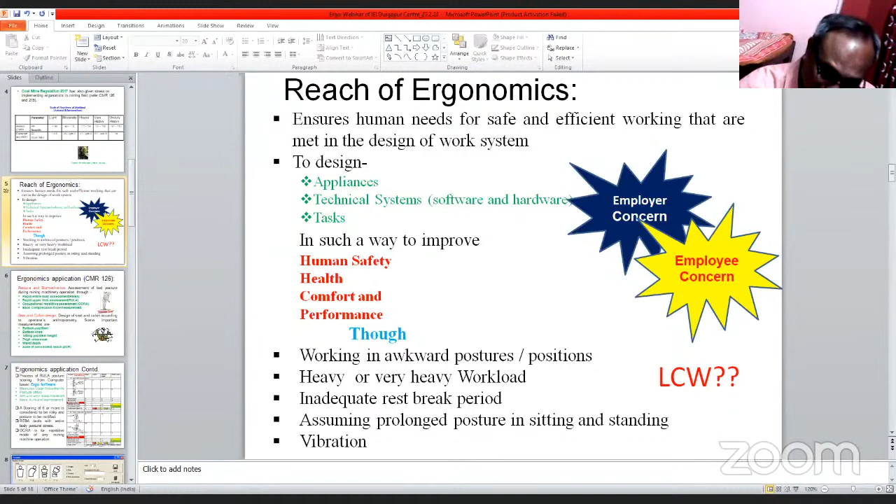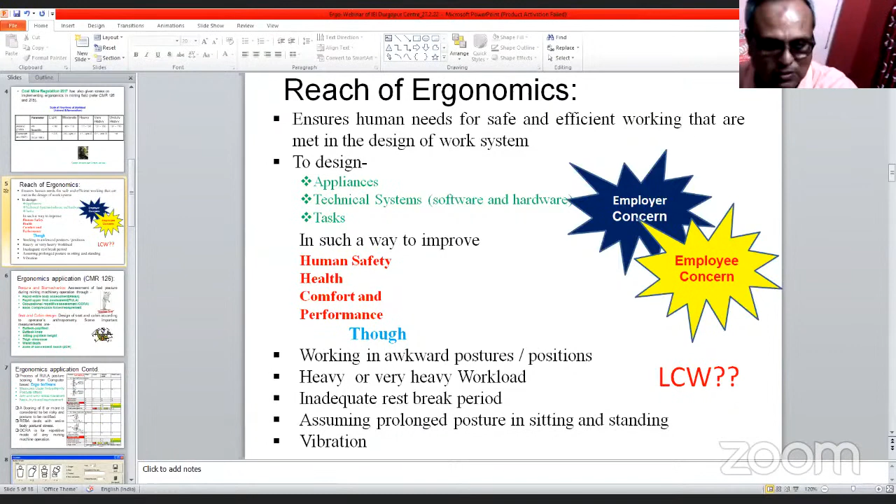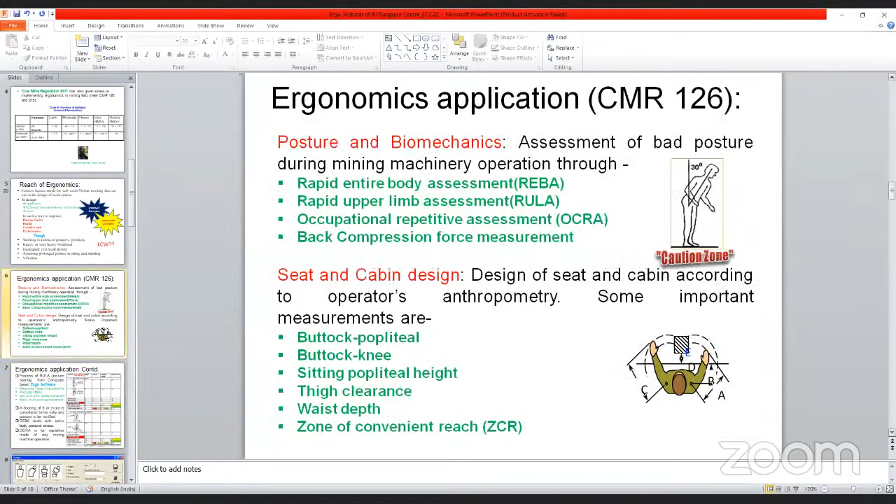Slide is not moving again, sir. Yes sir, yes sir. Now fine, sir. See, while I'm coming up from the PPT showing it is coming, it is short one. When I go full screen, will it work in this? Can you see it? It is visible sir. No, full screen not required for recording. Okay thank you.

So let's see now the ergonomics application on the RULA posture, rapid upper limb posture. You see, it is based on the computer scoring, computer-based scoring. This sort of thing you didn't come across.

If it comes to 6 or more, the posture is considered to be risky, and this posture is immediately to be rectified. Likewise, the REBA, rapid entire body assessment, deals with the entire body postural stress. OCRA deals with the repetitive mode, for example drilling in mines, we are putting repetitive holes - one hole, second hole, third hole, fourth hole, fifth hole.

So this OCRA - likewise this other one is not OCRA, this is the RULA, so OCRA will come into place. Based on this, your computer-based software calculates this OCRA score, and if it is coming beyond the risky zone, then we have to give some sort of recommendation.

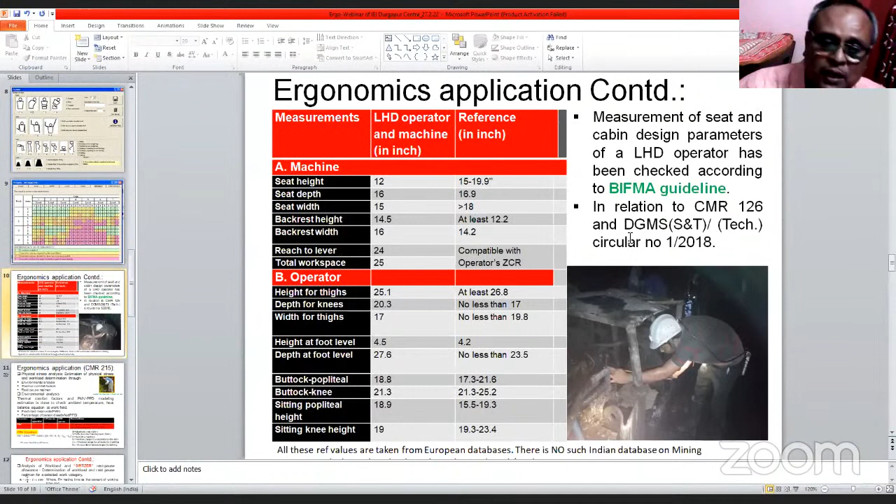Likewise we can examine every machine with the reference value against the operator measurements. We can do this for every LHD operator - load haul dumper. This is the load haul dumper. Likewise there are different other machines - continuous miner, drill machine, SDL machine, side discharge loader. All machines can be checked through these BIFMA guidelines. These are very important guidelines which ergonomists follow, and all these things are now coming in the DGMS circular 1/2018.

Now comes the 215 CMR, coal mine regulation. Here we have to estimate physical stress and do workload determination through different analyses - environmental analysis, thermal comfort factor analysis, and rest-pause regimen, which is known as work-rest bouts or work bouts simply. Next comes the environmental analysis - the thermal comfort factors like PMV and...

PPD mode - these are the predicted mean vote and percentage of persons dissatisfied. These are the models ergonomists follow to find out the environmental analysis, or environmental impact on the fatigue of the workers. Based on that you can see the PMV parameters.

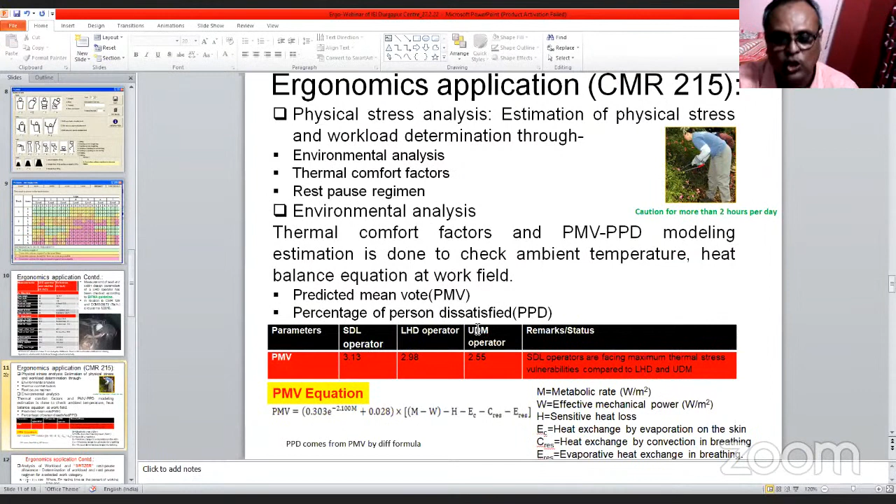We calculated this much for the SDL operator, this much for the LHD operator, and this much for the UDM operator, the drill machine operator. We found that SDL operators are facing maximum thermal stress in comparison to LHD and universal drill machine operators. So there is this PMV equation also.

Now you see there are some rest bouts. R means the resting time - you can immediately calculate one resting time. How? This is based on the Spitzer model, which uses workload as the basis for the rest-pause regimen for a selective category of workers. E means the energy expenditure, calculated in kilocalories per minute.

So you have to find out the kilocalorie value based on your beats per minute. I have shown you earlier the Astrand scale. Based on the Astrand scale, we will be finding out - we can convert HR, meaning heart rate, towards the energy expenditure.

Energy expenditure by 4 minus 1 into 100 gives the percentage of rest to be given per hour. For example, if energy is 5, then 5 by 4 minus 1 is 1.25 minus 1, which is 0.25, so 25%. This means in 1 hour, 15 minutes should be my rest per hour.

Likewise, the measurement of heat stress WBGT (wet bulb globe temperature) and threshold limit value differs for different depths of mines. As you go to different depths, the WBGT value changes, because it is based on 0.7 natural wet bulb temperature and 0.3 radiant temperature. This is known as the radiant temperature.

Based on this, NIOSH is the National Institute of Occupational Safety and Health, and this is the American Conference of Governmental Industrial Hygienists. Based on that, you have to select whether you will follow the NIOSH scale or the ACGIH scale. Hardly in India do we have this sort of scale.

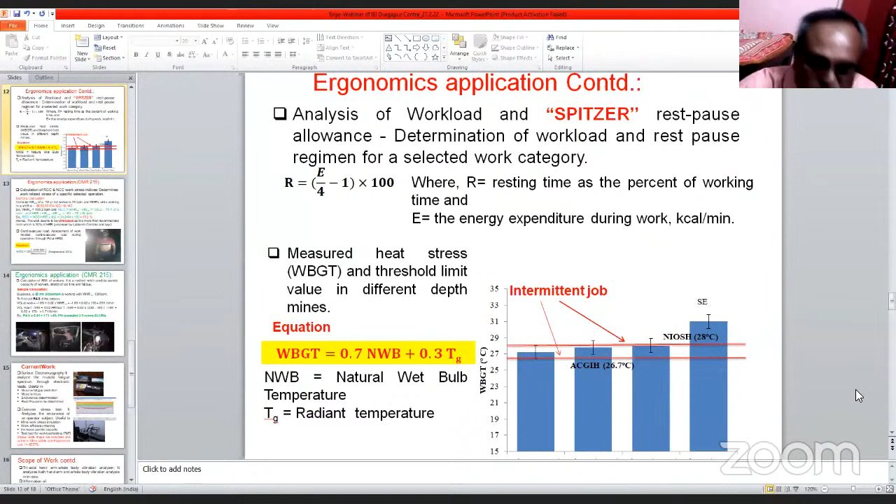You see this person, we took this study underground. In this, the MHRM is attached, this is the sensor on his chest. Its name is MHRM, mobile heart rate monitor. This is attached, the HRM.

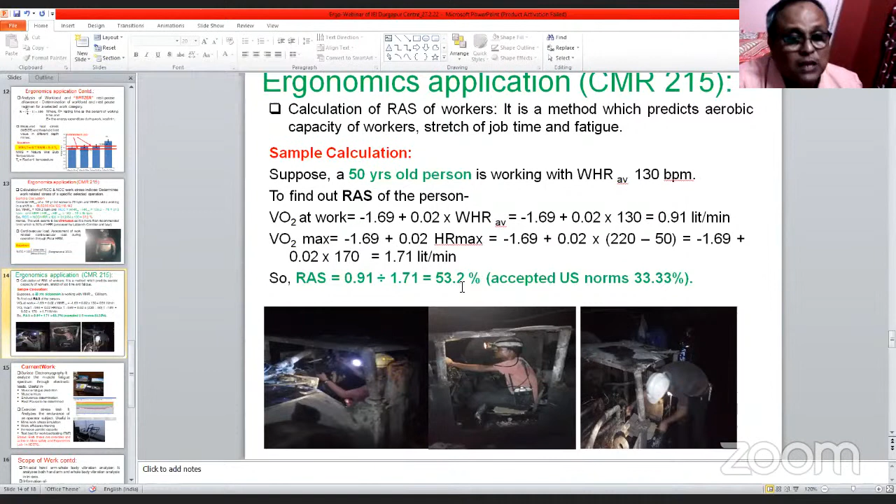HR max is 220 minus age. Age is 50, so it comes to 1.71. So relative aerobic strain will be this divided by this, which comes to 53%. It is much higher. The US accepted norm is only 33%, one third of 100. But here it is 53.

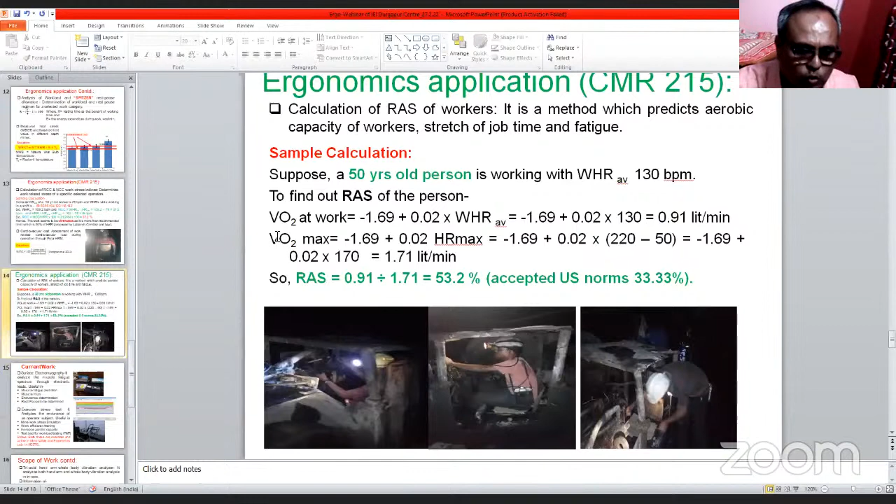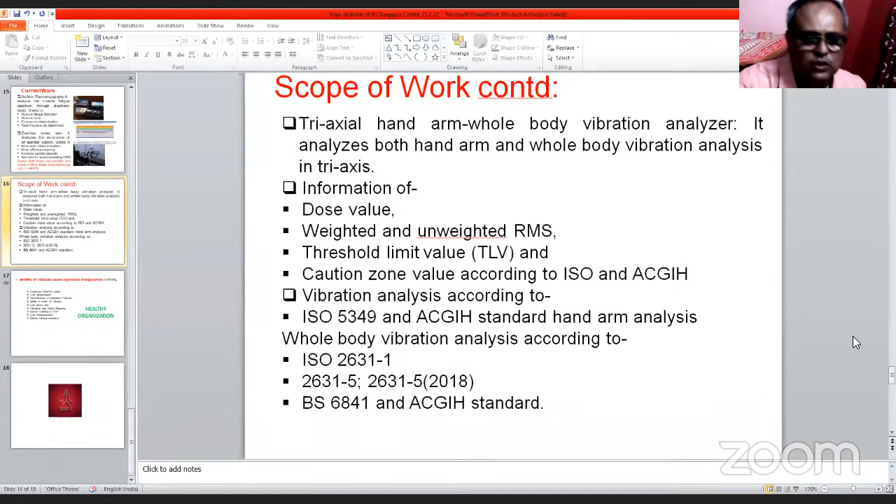What are the other scope of work? The triaxial hand-arm related vibration analyzer, we can do it. So I can give you this sort of information, this vibration is required, and based on this the information is required: what is the dose value, what are the weighted and unweighted root mean square values, what are the other threshold limits, based on different ISO and American Conference of Governmental Industrial Hygienists standards. Based on this, we have to find out whether the dose value is correct and whether the other threshold limit value is correct. We will be able to compare.

Now what are the benefits we have? The benefits due to this computer-based application in ergonomics and mining will give you improved comfort level. You can have low absenteeism. You can improve posture so that awkward posture can be identified. Not only that, you can give recommendations on how posture can be made beneficial towards the worker so that their musculoskeletal disorders will be delayed, or there will be no musculoskeletal disorders.

And now the very important term, the delay in onset of fatigue. For fatigue assessment technique, there is the Brouha's technique; due to paucity of time I am unable to show how fatigue assessment is done by this technique. So there is a technique by which fatigueness can be assessed. This will obviously give us a lower injury rate, and by this we can have better occupational safety and health, and it will give very low compensation. Why low compensation? Because almost all mining companies give some compensation to workers at the end of the year due to injury. That compensation would be very low or insignificant if we can bring in all this ergonomic application we are discussing.

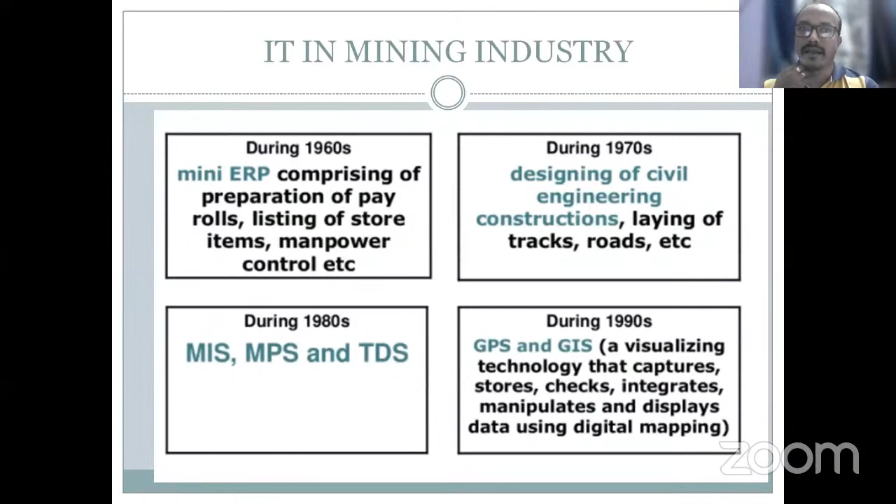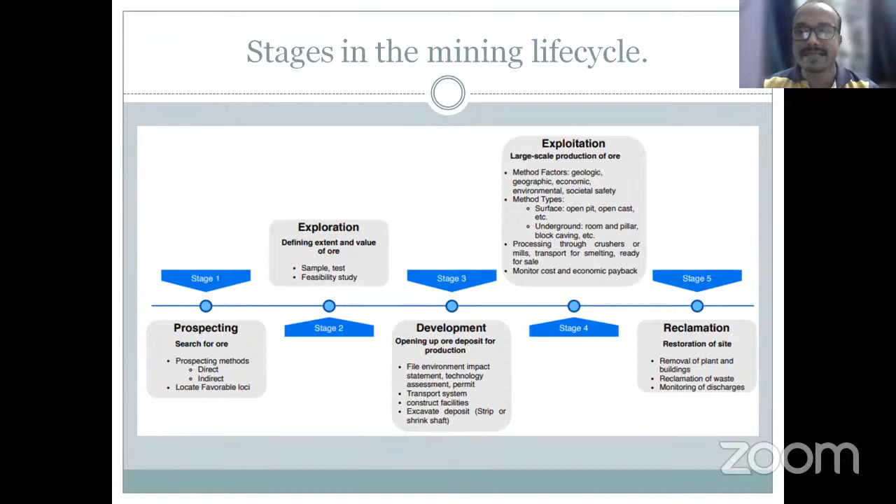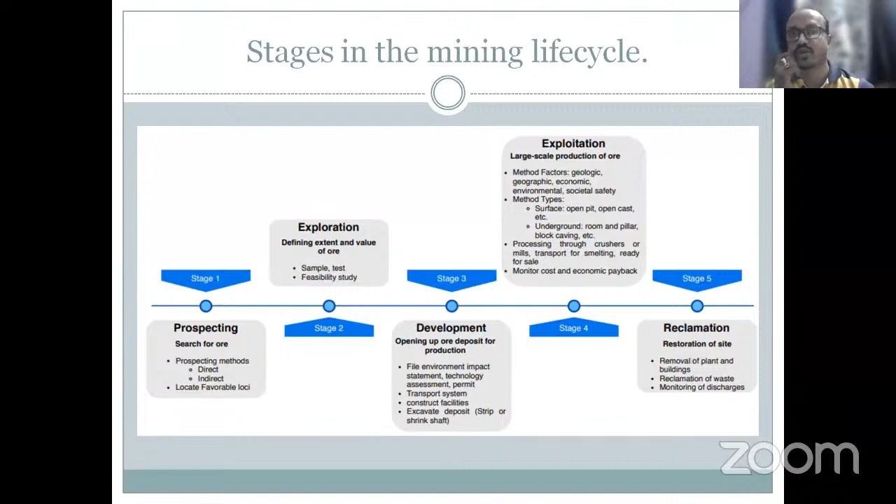The last stage is reclamation, which is nothing but the removal of plants and buildings, reclamation of waste, and monitoring of discharges. Those are the 5 stages in the mining life cycle.

Now, IIoT standardization: the relevant industry reference architecture proposed by standard bodies. In my lecture, we discuss 4 standardizations of IIoT. Number 1 is Industrial Internet Reference Architecture, number 2 is RAMI 4.0, number 3 is oneM2M, and number 4 is the Arrowhead framework. These 4 IIoT standardizations will be discussed throughout our lectures.

In the business layer, they provide functions to allow end-to-end industrial operations such as work planning, scheduling, enterprise resource planning (ERP), and life cycle management. In the application layer, it allows the execution of tasks or goals by implementing the actual application logic, such as the application programming interface and user interface. Those are examples of the application layer.

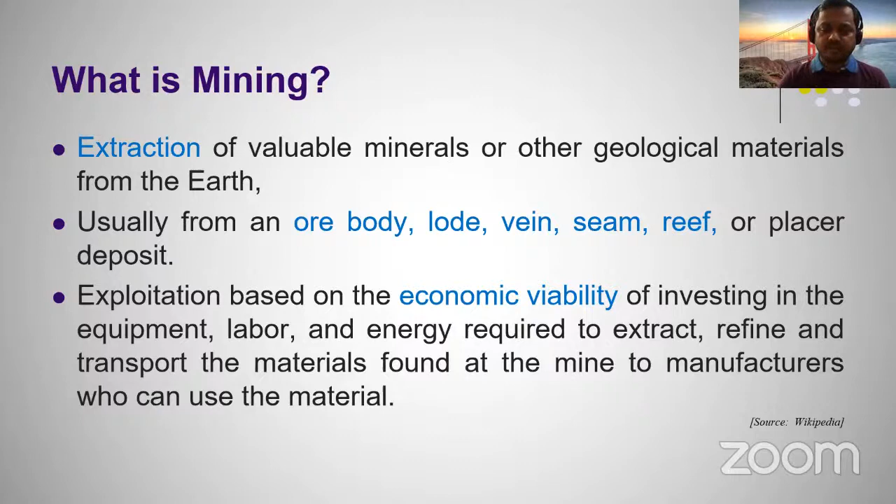Now we have to know what are the places where we can apply computer. There are so many areas in mining where we can apply computer, especially surveying machines, conveyor belts, and GPS systems. In surveying machines, the surveyor machines are connected to laptops to get 3D views of the distributed geology around a place. Computers are also used in controlling the conveyor belt nowadays, and we can even use GPS systems to track each and everything that we want to track.

And one more thing, the operational data is huge data. To control those data, to preserve those data, and to get some analytics, to get some pattern from those data, we need the help of storage in computer.

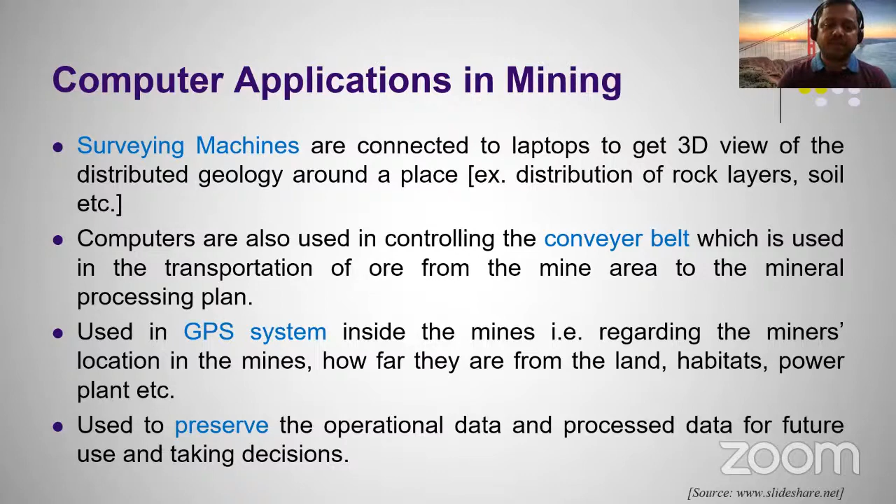Now, what I would like to suggest is computer application in mining, or rather we should say digitalization in mining, because digitalization in mining is basically the greater term compared to computer application in mining. Now, what is digitalization in mining? It refers to the use of computerized or digital devices or systems and digitalized data that are used to reduce cost, improve business productivity, and transform mining practices.

It remains increasingly difficult for mining companies to decide which digital technologies are most relevant to their needs and individual mines. Here I would like to say one thing: nowadays there is no area where we cannot apply the computer, definitely, but especially in mining we have to take care of a lot of things, like which technology should we use or not use, because there are so many constraints in mining. It is really a research area where we have to go, because a lot of things we have to consider.

Now digitalization in mining can have so many equal terms like fourth industrial revolution, digital revolution, digital transformation, intelligent mining, smart mining, mining 4.0. So basically there is a slight difference between each and every term, but on an average, all are going to define the same concept.

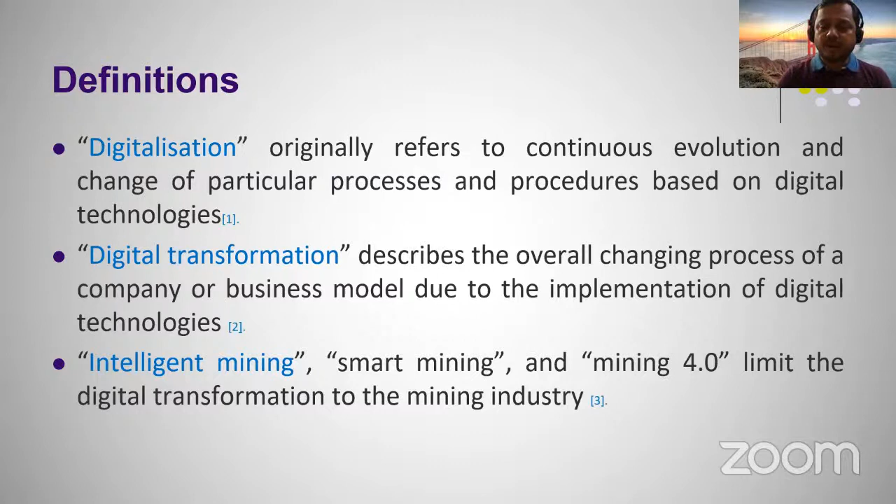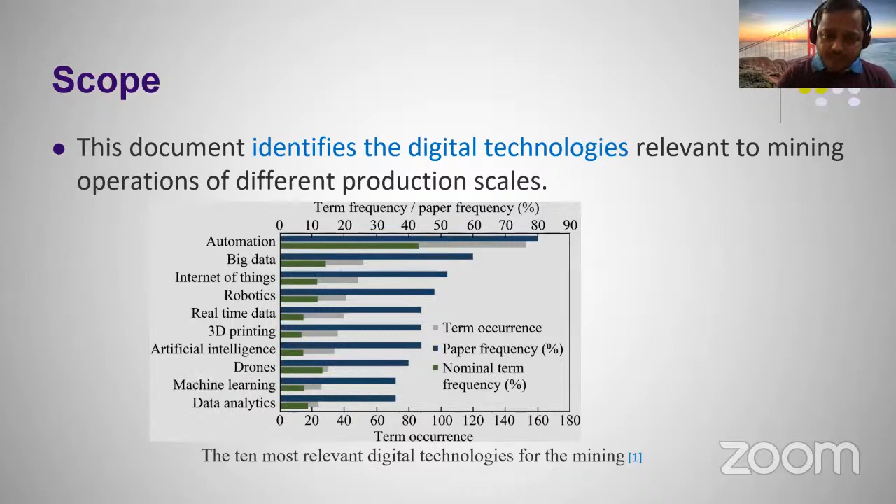Here we can see the automation percentage of use is 80%. Big data percentage of use is 60%. So like that, this is the hierarchy of uses of different computer technology especially in mining.

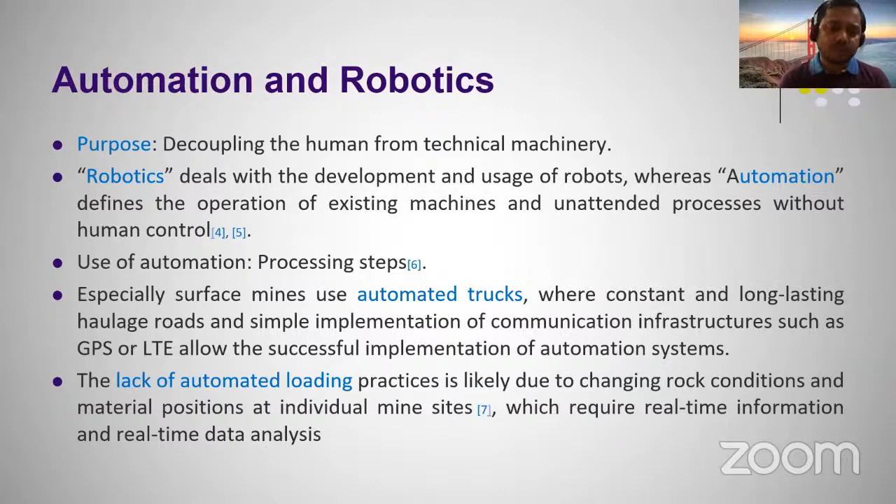As well, we have also found that automated loading is very difficult. The lack of automated loading practices is likely due to changing rock conditions and material position at individual mine sites. In each and every mine, there are different types of rock scenarios and different types of environment. So it is very difficult to implement this kind of automated loading. That is why we have seen automated loading application percentages is very rare.

Now, Internet of Things - as our earlier speaker, Dr. Arindam Biswas, has told so many things regarding Internet of Things, I think no need to say a lot about it, but still I'm going to say the basic definition. IoT is an approach whereby physical objects are interconnected and able to communicate their status over the internet and be controlled remotely from any position.

So it is really a great advantage, and we can think that with the help of this Internet of Things, the whole world is going to change in the upcoming 10 or 15 years. Everything will be controlled. With the help of a single click on mobile, we can control a lot of things. So that same thing can be applied in mining also.

Some of the uses are: track the position and loading status of trucks, which helps to coordinate the mobile equipment; track people for emergency situations; monitor rock stability and movement in underground mines; connect to low-cost sensors to deliver data to a central point; and act as a cross-platform system. There is no end if we go to describe the application of IoT.

Now, next technology of computer science is big data and real-time data. Nowadays, big data is a mostly used jargon in computer science technology. What is big data? Big data means a huge amount of data that cannot be handled by conventional data processing or human competencies. So we need some sort of expert system, some sort of expert machines that can handle this big data. There are different softwares used to handle those, and different architectures like Hadoop are also there in the market to handle this big data.

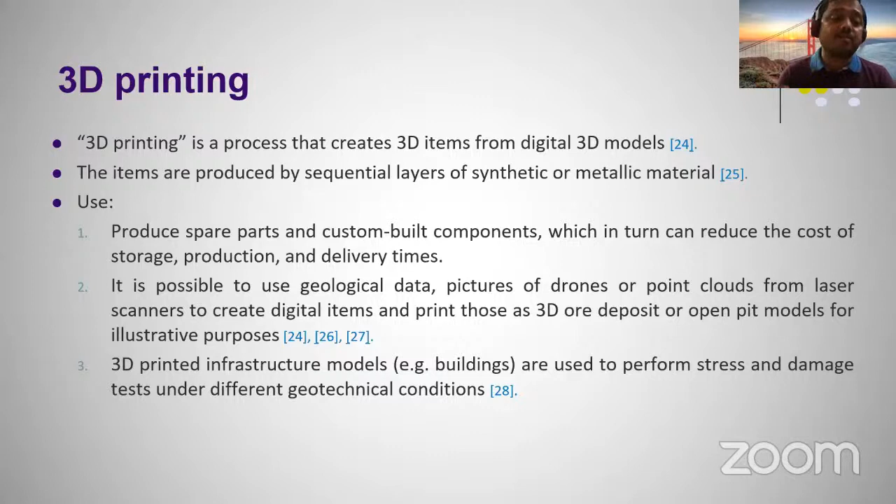With the help of 3D printing, it is very easy for us to teach students, because sometimes it is difficult to show the actual scenario to students before they become expert in that domain. With 3D printing, we can utilize it for instruction and in our teaching-learning process. So there are a lot of scopes for 3D printing.

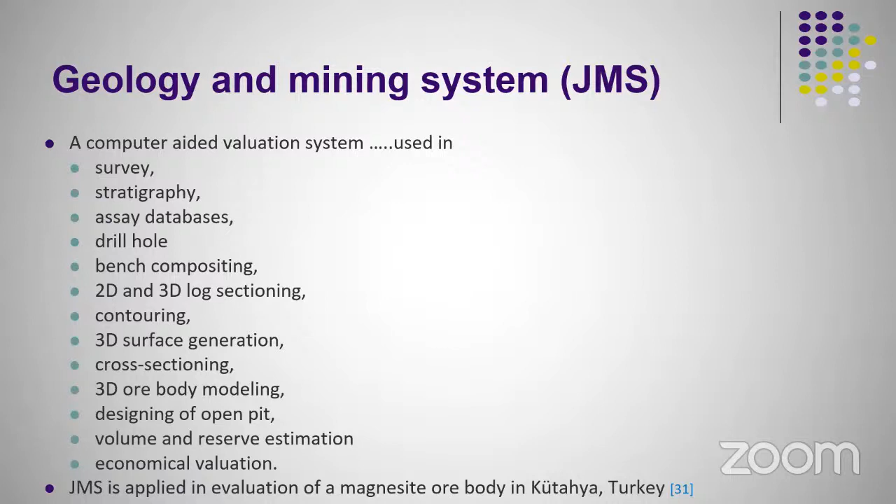One more example is the Geology and Mining System, JMS. This is also a very good application of computers - a computer-aided valuation system. It can be used in many areas like survey, stratigraphy, assay database, drill hole, bench compositing, 2D and 3D log sectioning, contouring, 3D surface generation, cross sectioning, 3D ore body modeling, designing of open pit, volume and reserve estimation, economical valuation, etc. This JMS has been applied in the evaluation of a magnesite ore body in Turkey, and is already implemented there.

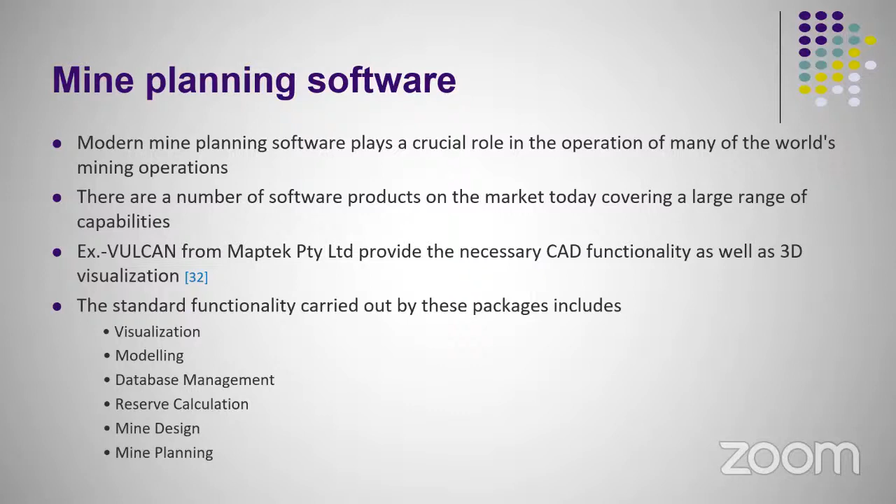Now, there are a lot of mine planning softwares also available. Modern mine planning software plays a crucial role in the operation of many of the world's mining operations. There are a number of software products already in the market covering a range of capabilities of mining. For example, Vulcan from Maptek Pty Limited provides the necessary CAD functionality as well as 3D visualization. Normally, the standard functionality carried out by any mining software includes visualization, modeling, database management, reserve calculation, mine design, and mine planning.

In conclusion, larger mining operations or big organizations can apply many more digital technologies based on their need. But it has been observed that in lower production sectors, it is not so easy to apply digital or hardware technologies because they don't have that much fund, so it is difficult to choose which technology to apply. So for minor producers, it is required that digital transformation solutions should be tailored to their capability, since all the capabilities may not be required for those organizations.

Based on only their demand, we should prepare some tailor-made software so that they can use it and make progress in their life cycle. Here I have attempted to show some applications or technologies of computer science to apply in mining only. So practically it is an ocean.

Actually, computer science is not a standalone area or standalone engineering. Rather, we can say it is a set of tools that we can use in any domain. It can be mechanical, civil, or mining. So we have a lot of tools ready for you. You just choose which tool you want to apply based on your need, and you will get benefit from that tool.

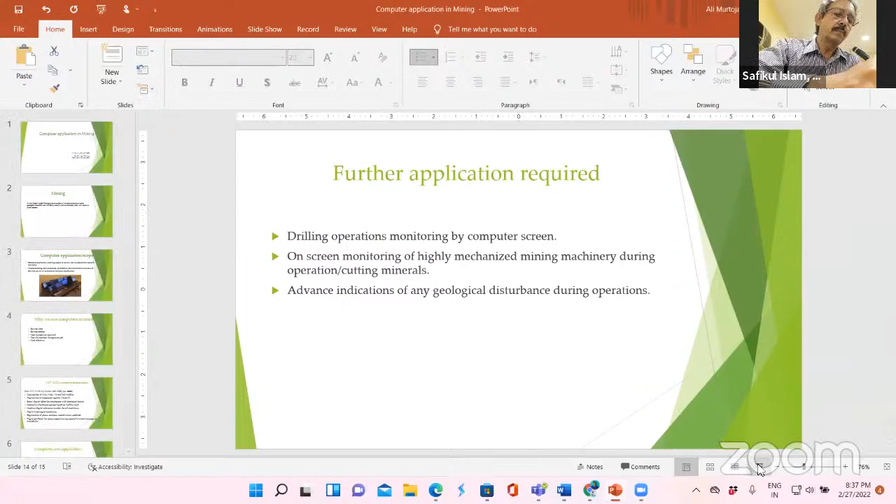So I'm sharing my screen. Is it visible, sir? Ranajit sir? Okay, yes, it is visible. Okay, let's start. Computer application in mining.

Being directly involved in the mining industry, I will discuss some topics or points, which may overlap with what's already been discussed or may not. During the previous stages when mining operations started, computers were not available, but mining operations were still continuing. During the development of computer or digital platforms, several sectors incorporated digital platforms to increase their production and productivity, and profitability.

At the same time, mining sectors also incorporated in different fields and activities the utilization of computer or digital platforms to increase production and productivity in different aspects. Though not up to that mark, the utilization is being done in several activities with the help of computer or different types of software. Being an industry professional, I will discuss what are the scopes where computer is being applied in mining, what areas are not yet touched, and future scopes where computer applications can be done. All those things I will discuss in brief.

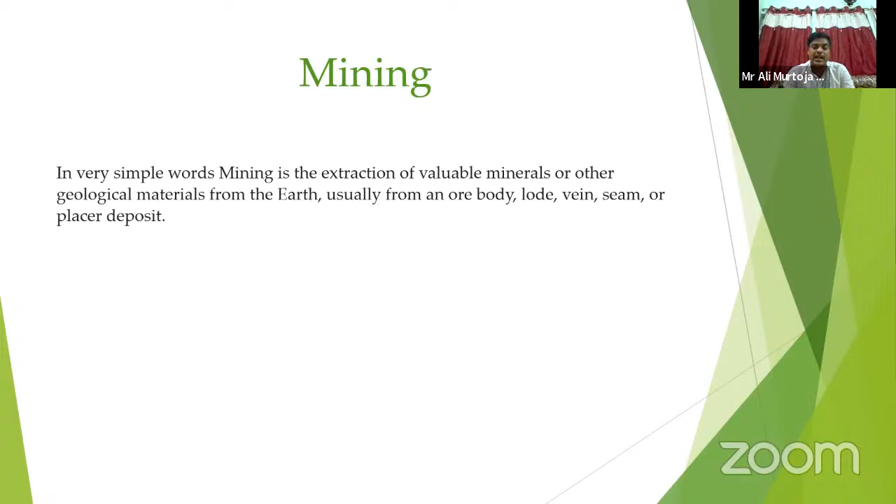To complete all those activities, we require manual work or may require other alternative ways. So if the same work can be done manually, or there's an alternative way that requires less manpower, less cost, less time, why should I not use those alternative ways? That's why computer applications come up.

So what are the scopes of computer applications? Computer applications mean enabling people to use it as a tool to complete or finish a specific task easily in a shorter period of time. So this is what computer applications means.

For example, word processing or word making, data processing. It may be in the form of manufacturing, production, or data related to employees working in a particular mine or unit, maybe in the form of spreadsheets, communication purposes, or software used for different types of purposes or activities. So all these are computer applications, in all the fields where computer can be applied for better efficiency. So why do we use computers in mining?

It saves lots of time, the same work or activity that can be done manually. For example, mine planning for a particular block, if done manually, requires several persons engaged in several activities if we don't use any digital platform or computer. That will take much more time, require much more labor, and require much more manpower.

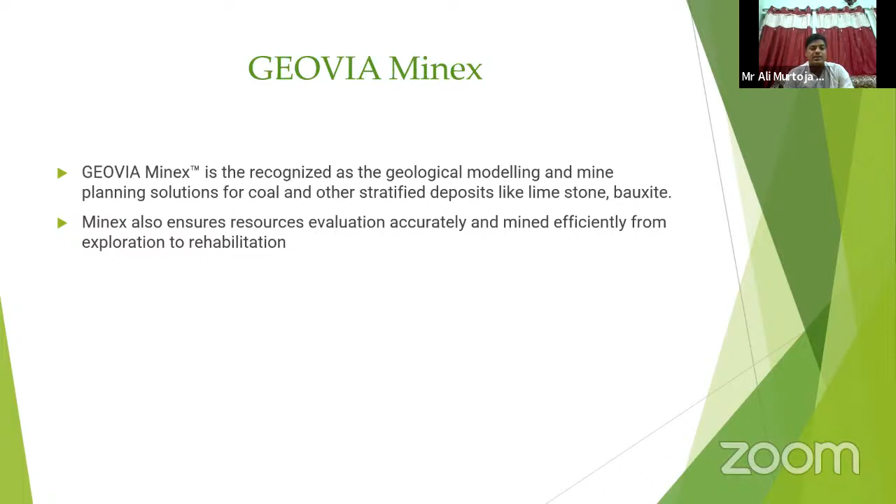There are some softwares which are used widely, not only in India but all over the world, like GEOVIA Minex. GEOVIA Minex is recognized as a geological modeling and mine planning solution mainly for stratified deposits. Stratified deposits mean coal, limestone, or bauxite, minerals deposited in stratified layers. Minex ensures resource evaluation and mine planning efficiently from exploration to rehabilitation, and all stages of planning are done through GEOVIA Minex for stratified deposits.

GEOVIA Surpac is the world's most popular geology and mine planning software, used in around 120 countries for open pit, underground, and exploration purposes. This software is mainly used for modeling and planning non-stratified deposits like metal mines.

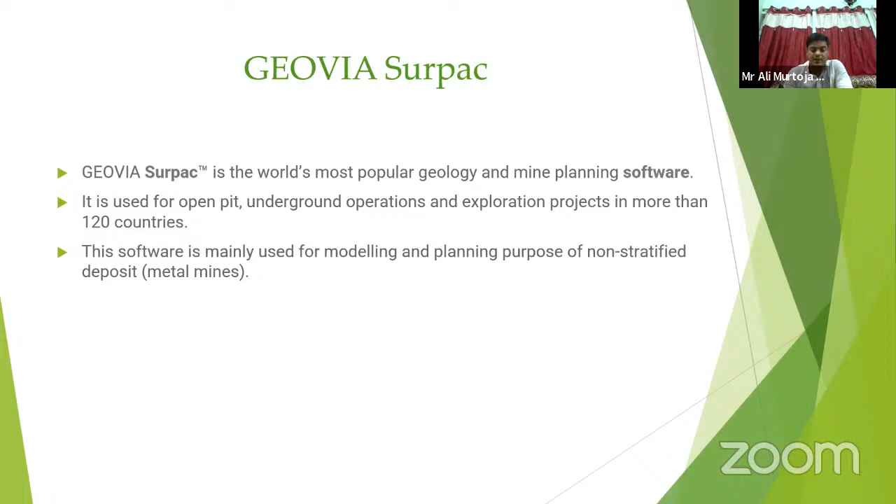Ventsim is another important software used in underground mine ventilation simulation. For underground mine ventilation, there are lots of problems faced in different Indian mine scenarios, so Ventsim is a good solution. This package includes designing, modeling, and simulating ventilation, airflows, pressure, heat, gases, fire, and many other ventilation-related information with the help of a computer.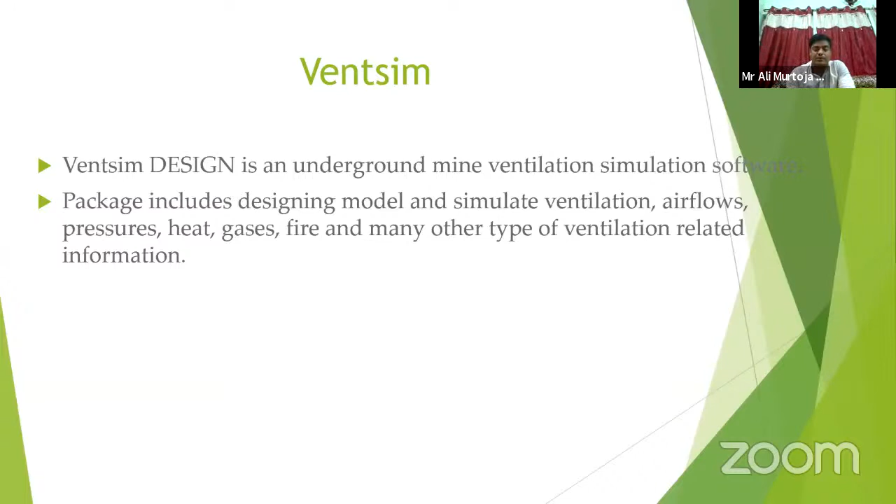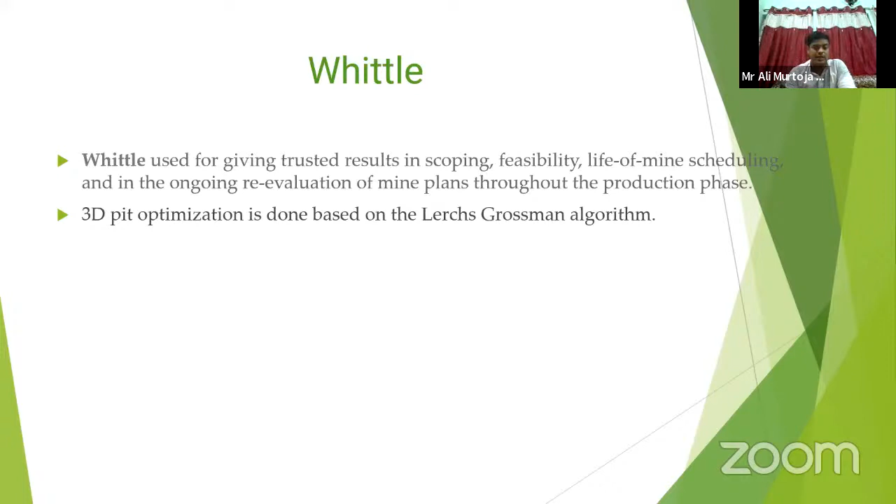BlastIQ is another software used for optimization of blast designing, giving better results for blast outcomes and fragmentation, which indirectly reduces costs. It provides centralized blast information management, allowing users to view, share, and analyze blast information anywhere at any time. This software is very important for blast designing and achieving effective, high-quality blast outputs.

Enterprise Resource Planning, or ERP, is the integrated management of main business processes, often on a real-time basis, done with the help of software and technology. ERP is usually referred to as a category of business management software, typically suited for integrated applications used by organizations to collect, store, manage, and interpret data for many different activities.

For mining operations, we extract coal by drilling, blasting, loading, and transporting materials to the surface. All this data is collected—how many holes are drilled, what time is required, how much explosive is used for blasting, how much coal is transported, and how much time is required. All this information is gathered, stored, managed, and interpreted to get real-time basis analysis.

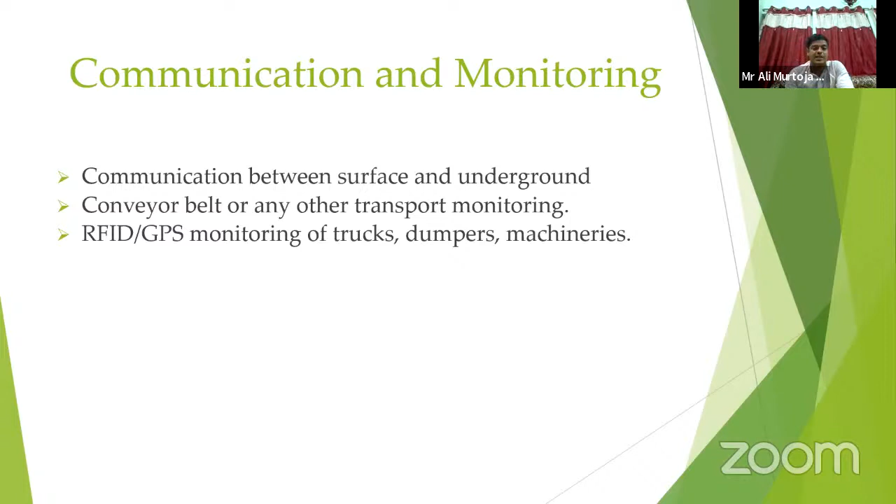In such cases, if there is some arrangement for a camera system or computer-based technology, a person can easily monitor the machine, in which direction it is cutting, on a real-time basis - in which direction the face is advancing - that can be monitored by sitting in one place.

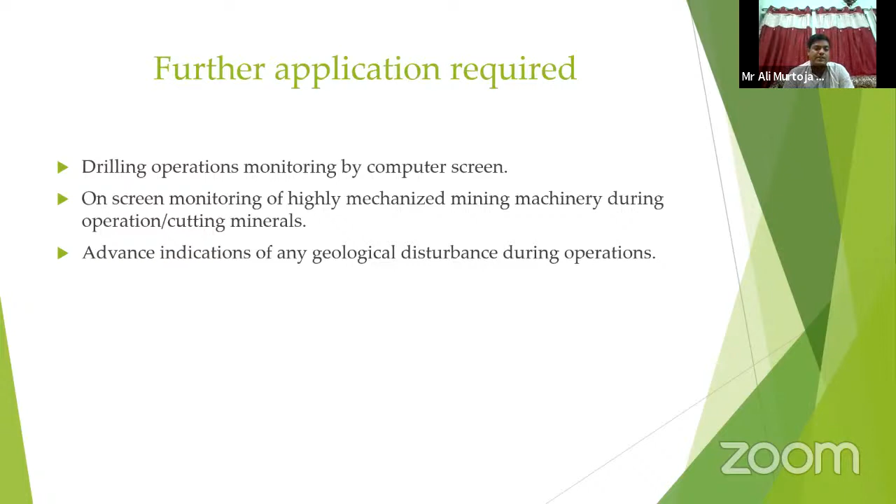Thank you very much for your valuable feedback and lecture. So with this, we can end our lecture. But whenever I find an opportunity to attend such lectures, I always find that my knowledge increases, and it is a highly enriched presentation by all of our eminent speakers. I must thank all of them.

Whether it is coincidence or not, we started with human and machine interaction - Professor De, as told during an ergonomic study. Then we moved to IoT separating human and machine, as told by Professor Vishwas. After that, the decision taken by the human was replaced by artificial intelligence, machine learning, and other algorithms, as described by Joydeep Datta. Lastly, Ali Murtoja described how to plan with computer applications like Surpac, Minex, and other software.